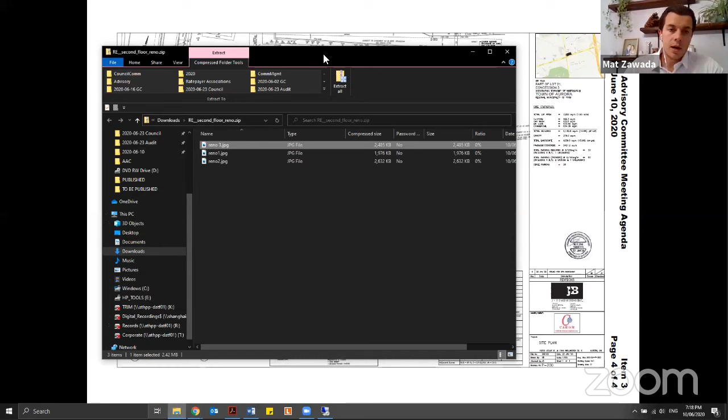The exterior sidewalk, if you took a look at it, did not meet the requirements for exterior paths of travel. We have to have a bare minimum of 1.5 meters running around the full building. On the north side, from my recollection, it was at about 1.2 meters, so a little too small. The front, I believe, did meet the requirements, but either way, based on the code for design of public spaces, they need to have the 1.5 meters running around the building, so I put that in as a piece they have to address as well.

Running slope was, and I'll get the committee's feedback on this, I hope you guys can chime in. This is one of those plots of land that I think might fall into the exceptions. I've sent comments back indicating we'd like to see the ramp slopes addressed because they are quite heavy. The minimum we should be seeing is either 1 to 15 or 1 to 20, so you're talking about 5 to maximum 6-7% ramp. From my recollection, I believe it was at about 10% for the ramps, so I do want to see them addressing it.

The issue is, and this is where there might be an exemption in the legislation, the grading might not be able to be fully adjusted. If you've taken a look at that plot of land, it's running at quite an incline. So I wanted to get your feedback on how much of a hard push we really want to make with this. I haven't received comments back on the site plan yet. I sent this over to them in March, so we'll probably see a draft revision in the next couple of months where I can provide exactly what they're saying. But in case I get comments over the summer, since we don't meet again until September, I want your feedback in advance on whether we make a big push on the grading expectations, or provide some leniency based on the exemptions in the design of public spaces under the AODA. I'll let the committee chime in on that.

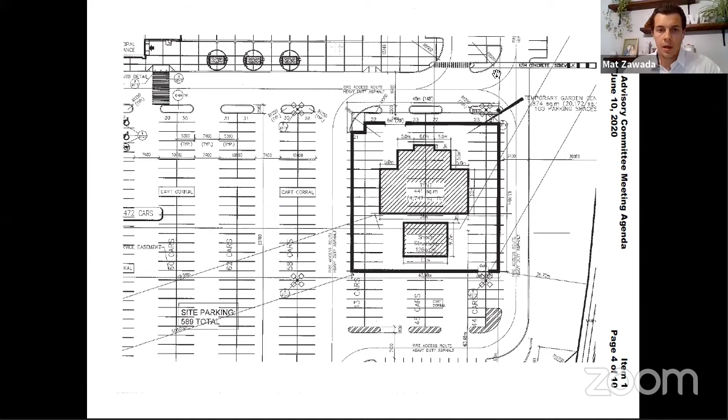To be honest, Ashita, if you don't mind putting it up for everyone to see. Overall, this site was actually pretty well done. No, that's not the right one. So while she's pulling those in, I'm going to wait until she has it because I have to change the screen on my computer. I just want to make sure you guys have it in front of you before I start talking about it, so I'll just wait a second.

Mat, is this building industrial, manufacturing, commercial, institutional? It wasn't indicated. I think it's going to be more like a business park from what I was aware. They did have, and thanks Ashita for putting that up, an individual business plaza specifically, and it looks quite large. So it looked like probably numerous offices. I'm just going to switch my screen.

So the only thing that I indicated over there was just for them to provide vertical signage. Again, this is just usually me providing reminders, because to what Joanne was mentioning earlier, sometimes they forget about these things, right? So I put that piece in there.

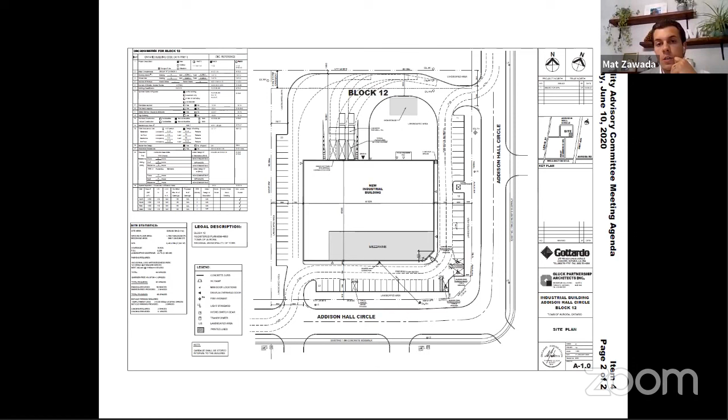So I kind of... sorry, go ahead Max. I kind of agree with them in the placement of the bike rack because it doesn't obstruct any path of travel.

So just in case anyone didn't catch what Max was mentioning, he was agreeing with the point I was just making, as I kind of took back what I was saying earlier about the bike rack being left over there, because it doesn't obstruct the exterior path of travel. Did I get that all right, Max? I'll take that as a yes.

One last thing I highlighted, I forgot to mention as well, is I did indicate for them to provide a crosswalk actually connecting the exterior paths of travel between the plazas. So there isn't anything indicating for someone to actually be able to cross Addison Hall Circle to all the other locations at the moment. That was one final comment I included that I just failed to mention earlier.

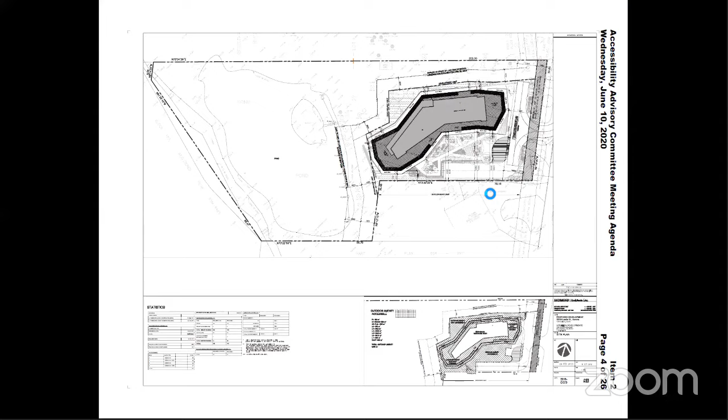So I'll start going through the comments I made on this specific site. This one's going to make Joanne chuckle, but again, they have to meet the requirements of the Aurora zoning bylaw. The type A spots were not at the 3.65 meter spec we expect for those parking spots. Joanne, I think why this gets missed quite a bit for the Town of Aurora is we go above and beyond what the legislation expects.

The legislation is 3.4 meters, but we ask for extra size to be added for our type A spots. The type B is the same. So that might be part of it, the developer just didn't take the time to look in detail at our zoning bylaws prior to submitting their original drafts. That's just me thinking this through, but I thought I'd throw that in there.

They were also missing the bare minimum number of accessible parking spots required. For this site, it's 7. I've highlighted that they have to meet that according to the AODA Design of Public Spaces standard.

On the top piece here, I'll go through my comments according to what we see. The drawing is backwards here for me, but for the greenery space they have available, I've mentioned they need corresponding lighting provided throughout the gardens to ensure anyone walking through those paths of travel has it lit up properly. It's nice they've provided that for residents, I just want to make sure it's properly lit.

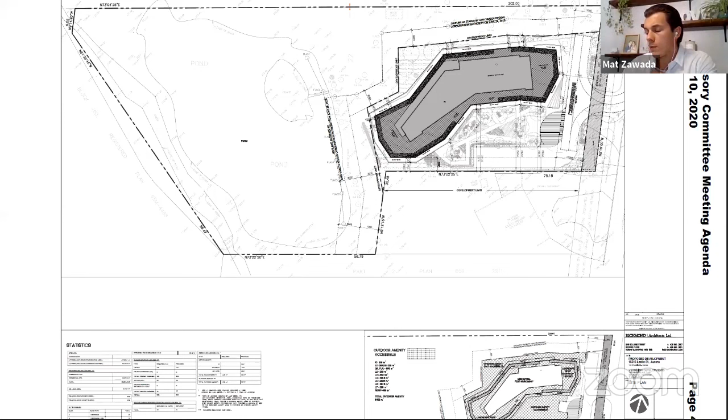Okay, the last two pieces for the outdoor before I have Ashita move down to the parking areas. On the top of this building, there is allocated outdoor space provided to the residents. I've asked for a minimum of 20% of the tables to be accessible if they're going to be providing any kind of eating areas. This aligns with the AODA expectation in case they put that in there. They haven't highlighted that it's going to be eating areas, but just in case they throw that into the site plans in future drafts, I've already mentioned that for them.

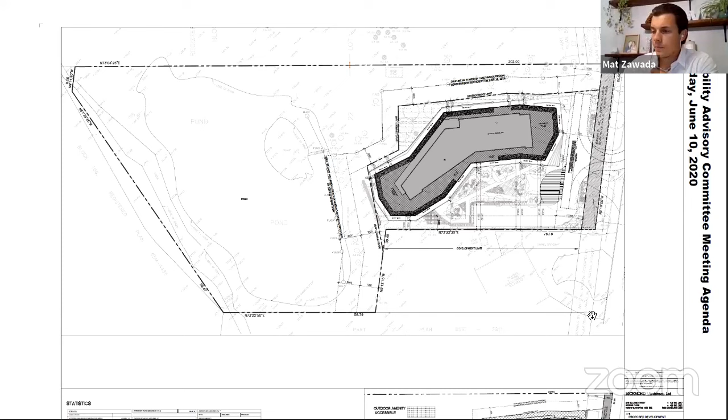And ensuring that the minimum sidewalk path of travel is 1.5 meters. I believe there was a portion in the green space that I highlighted for them that actually didn't meet those standards as well. Ashita, if you don't mind sliding over to the next 2 slides, that would be the underground parking.

This might take you a little bit to get through it. This is where I was struggling earlier.

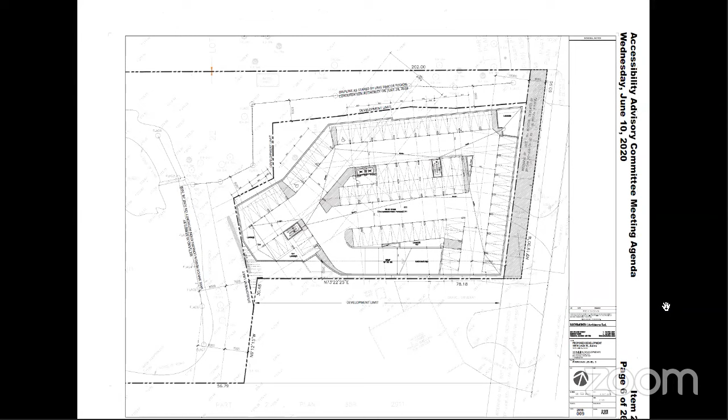As you're going over to that, can I just ask something? When you have a green space in the midst of something, do we ever provide an emergency phone on a pole or anything? There's people like myself who don't carry cell phones. Many people can go out and take a walk and maybe not even take it with them. Is there any possibility, like if somebody went down and fell down and was knocked out, that somebody would have some way to get in touch with anybody?

So to answer your question on whether or not it's an expectation, no, not based on the standards and legislation that we're looking at. I haven't even seen it. It wouldn't be in the Ontario Building Code because that's interior based, but I do like the point you've made. As you were saying it, I already wrote it down to bring it up over there because I don't see why not. If they're interested in doing it, I think they should consider it. So I have written it down, Joanne, but to answer your question, no, it's not in the legislation as an expectation for anything like that.

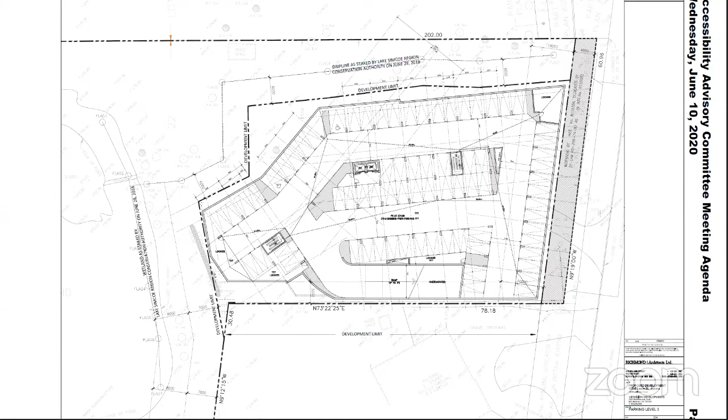Well, we had an attack on a young girl who went to the town offices, and we had different things that happened, and I just thought that maybe it's something to consider. Yep, so I've written that down. It's a good point. Okay, thanks. You're welcome.

Okay, so here is the parking lot, and I'm sorry that I look really close on the screen, just because I'm trying to see what I have in front of me as well. So the boxes that have almost like X's in them in the middle of this map would be your elevators that are provided. Now the accessible spots you can see are distributed around the elevators. You can see one is quite a bit far away, like on the left-ish side.

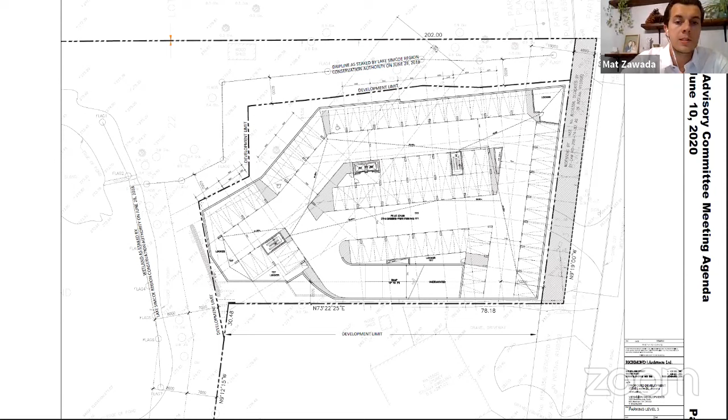It's hard for me to describe without being able to use my mouse, but I'm sure you guys can see on the top row of parking spots there are 2 indicated accessible barrier-free parking spots over there. So the comment I've basically made is to ensure that all the barrier-free spots on each floor of the underground parking are in the shortest path of travel to the elevators, so that way they're able to come in over there. And I've indicated that access aisles need to be put in there as well, because as you guys know, with any of the barrier-free parking spots, whether we're talking type A or type B, they have to provide the 1.5 meters right next to the spot in order for any vans coming in there and allowing for wheelchairs, scooters, or anything being able to come through.

Let me just check to see if there was anything else that I mentioned for the parking. I don't believe so.

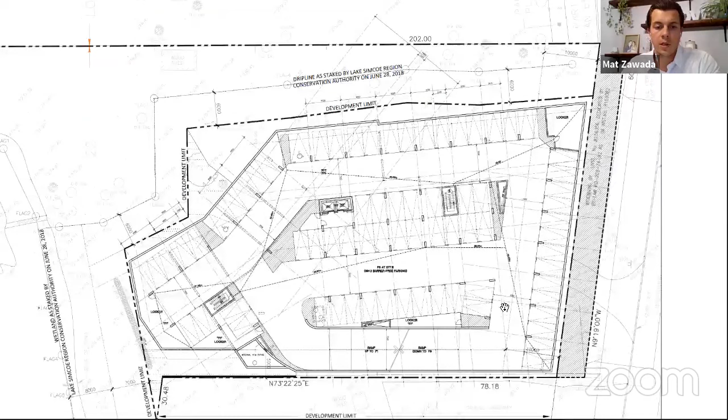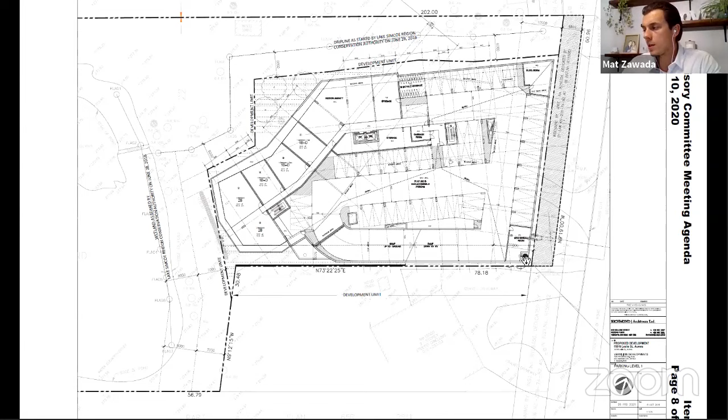Just so Ashita, you can start going through the different slides and people can see it. So what we'll have over here is there's 2 floors of parking spots. As you can see, again on this one, barrier free is quite a bit away from the actual elevators. And the remaining drawings that you would see on this site plan application would be the different floors available for the individuals coming into this tower. So on the main floor, there was nothing indicated about customer service, but we did mention that they have accessible counters provided in case they do.

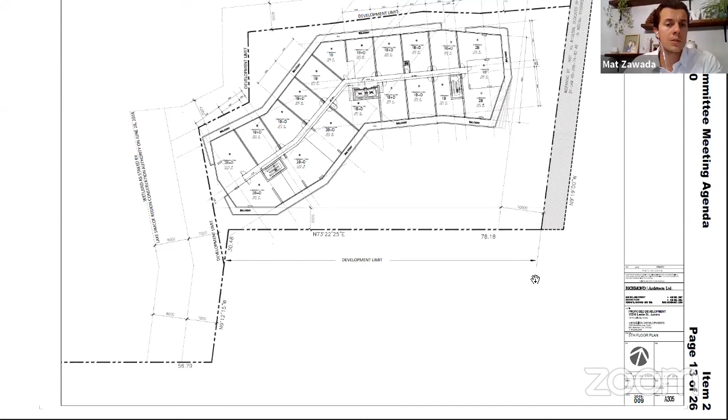For the top floor, there are two green spaces indicated. One of them shows that it's not accessible to all - it wasn't a barrier-free path of travel. I'll look through my notes since I noticed this today, and I want to make sure they provide an answer as to why that second piece wouldn't be barrier-free, so we can provide better recommendations for what we'd like to see there. That's it for the comments I have on this specific location.

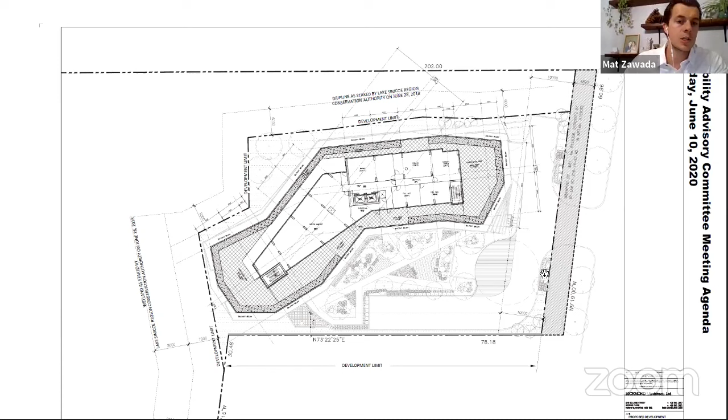There was a piece about making sure there's a universal washroom on the main floor, but again, that falls under the Ontario Building Code as an expectation, so it's not even a consideration for us to provide for them. There was quite a bit of comments for that. If anyone has any questions or further comments, I'm happy to answer or listen.

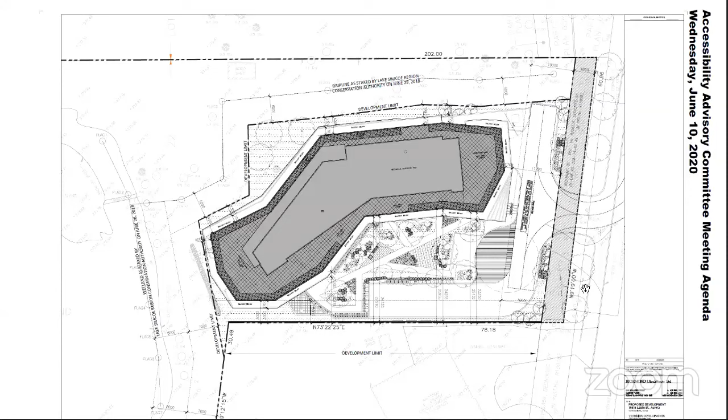Can I just ask - apologies if this was obvious in the plans and I missed it - but as soon as you enter the building, is the foyer on the same level as the concierge desk, or is it a 2-level situation? I know some resident condo buildings do have it in two levels.

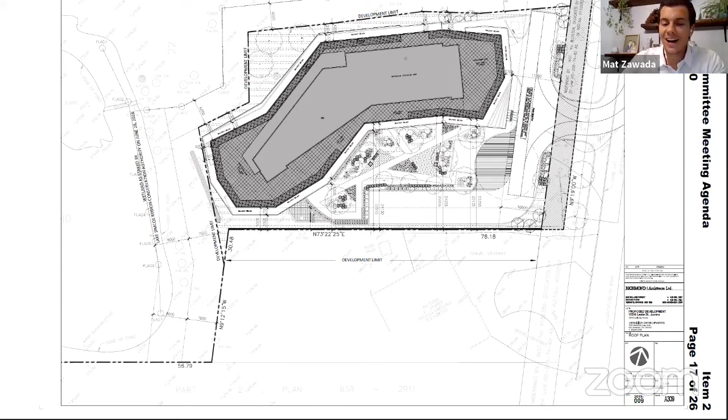I believe it was all one main floor. Based on what I saw, I didn't have any indication that there's a 2-stage setup with stairs, but I'll write it down just to double check. I don't want to zoom in because I know it'll freeze and crash - I tried zooming in on this one earlier today on my Mac and it wouldn't even do it. So yes, I believe it was just one main flat level, but I'll make a note to double check that piece, Rachelle.

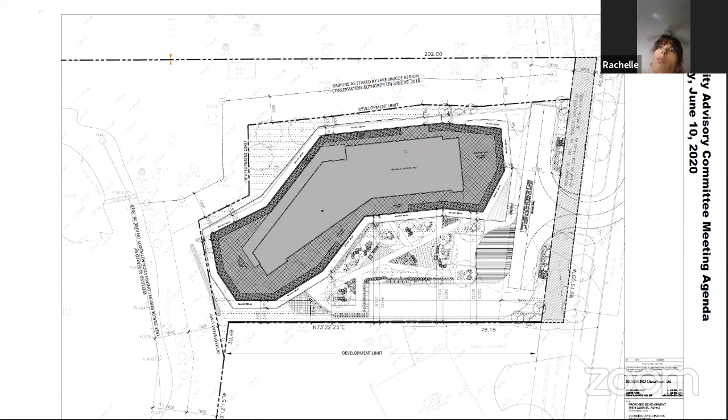Sometimes when they have the double level, they'll put in those little lifts - not quite elevators, basically lifts that are usable with a key - and those are just not ideal. I don't know if they can make changes at this point, but I was curious whether that was what they were planning. I'll double check on that and reach out to the committee letting you know afterwards when I take a look at it.

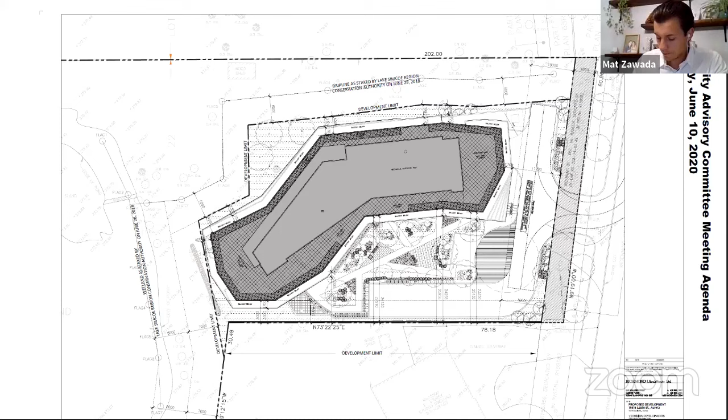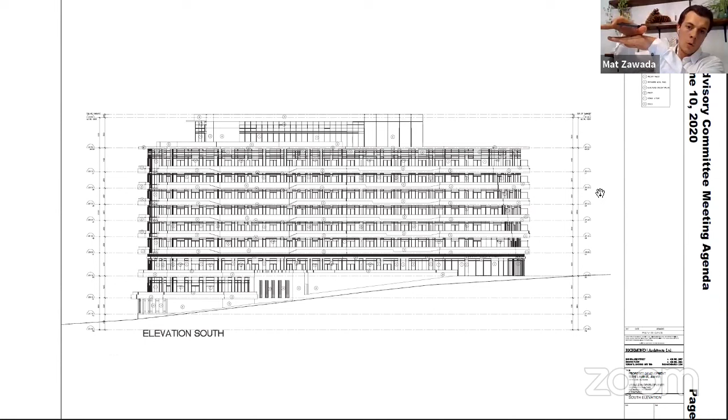Is there any other comments from committee members on this piece? So those last ones on the sheet are just the elevation drawings - you can see from north, south, west, and east how the building looks. A couple of the levels actually overarch one another, so it's an interesting design, but there's not too much for you guys to see in these elevation pieces. It's just more to see the aesthetics of how the tower will look.

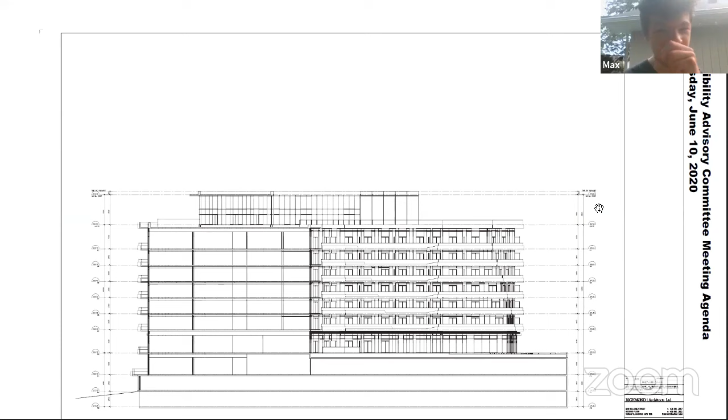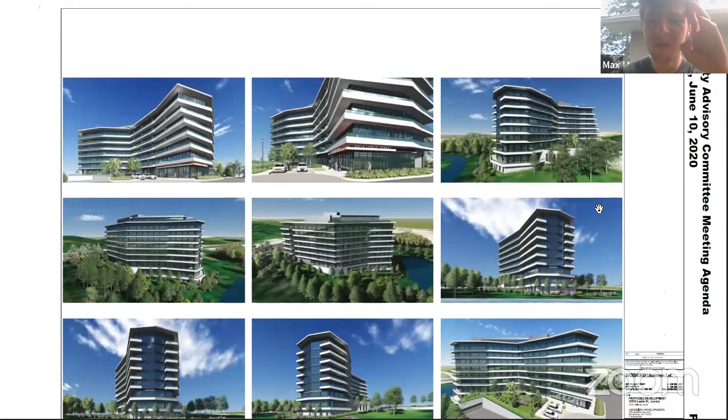One more thing - go ahead, Max. And the stairs, can we possibly suggest a accessible evacuation stair?

So you were mentioning with the stairs, what kind of evacuation route are you looking for to be placed in the stairs?

I just want to make sure I got you correct, Max. Are you asking for drawings to be provided on the floor so people know how to get to the emergency stairs? Maybe I'm misreading you, or if anyone else caught what Max was mentioning.

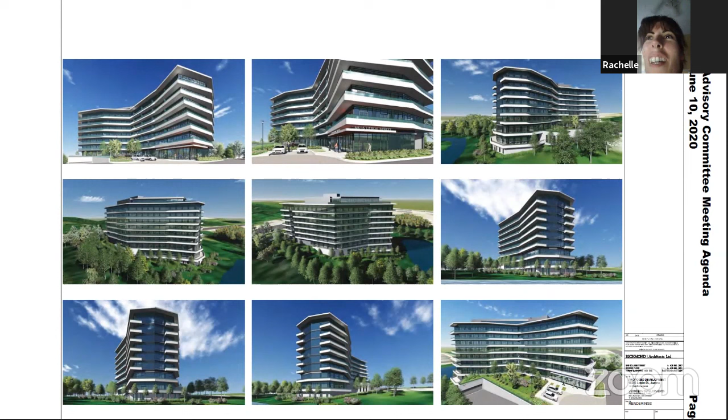When I was in school, I had to just sit at the window with a big help sign. So things must have changed.

So Max, I'm glad that you brought that up actually. I do want to look into it. Like I said, this is for sure a consideration piece, not a mandate one. So I've written it down, but I do want to look at the technology that you're talking about. That's cool to see.

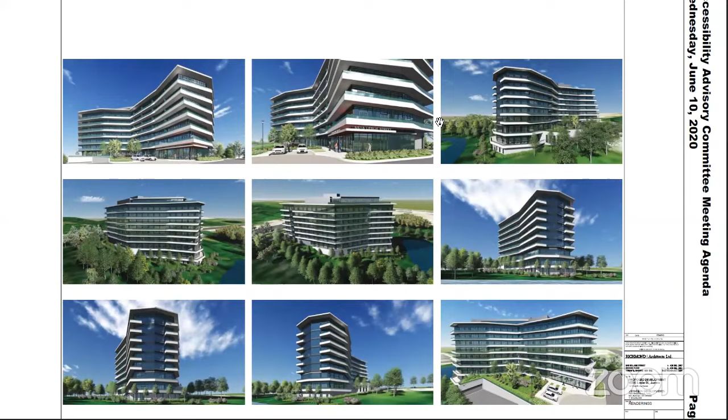So can we get a motion to receive as information, please? Haley? Seconder? Joanne? Glenn? All in favor? Aye, aye, aye. Any opposed? Motion carried. I guess we've gone through everything.

Matt, informational items, I think you have that one. Yep, so I think that was item 5 that we just went over. Is it roundtable discussion or are we on? So through you, Mr... I think we're on item 5, the roundtable discussion. Okay, just wanted to make sure, on the accessibility plan. Okay, yeah, alright.

Okay, John, you're taking away my notes here, man. I was trying to follow them. I'm like, what? I just flying along here. Oh sorry, I didn't flip the page.

Okay, alrighty, so yes, we can get into the roundtable discussion as normal. Let me just jump in, letting you know updates on our accessibility annual plan, and then you guys are welcome to come in with any additional requests that we want to explore or any concerns that you guys may have. Rochelle, I know you've reached out to me with something you want to talk about, so I'll let you jump in once I'm done my piece over here, if that's okay.

Yep, thank you, no problem. So just to update everyone on budgetary items, for capital projects, our Lambert Willson Trail is actually complete. So we have provided a lighting system that runs from Town Hall, the Aurora Senior Center, all the way over to the Aurora Family Leisure Complex.

So that is awesome. When I say complete, we are literally hanging on a string in terms of just waiting for the electrician to officially come by and sign off that the electrical work is good on all of the lighting systems. So I haven't officially stamped it as complete on our forms, but all of them are installed on the pathway. We're pretty much 99% of the way.